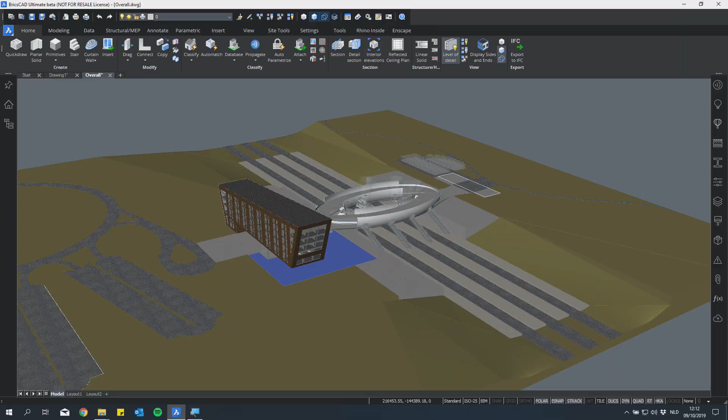So the Flowing Station is on a major rail line just outside of the city. It has 3 main buildings associated with it. On the east side, which can be approached from the bike path, will be an area for bike storage and also the new headquarters of the Travel by Bike organization. Currently, it's just a footprint.

On the west side, which can be accessed by car or by foot, will be the railway station operations offices, as well as a major entry to the terminal. These two buildings bracket the terminal, which spans across the tracks, connecting the two buildings, and also providing access to the platforms below.

This is the context for the current design. But as you can see, we've got quite a bit of work to do, especially since it's not living up to the term flowing just yet.

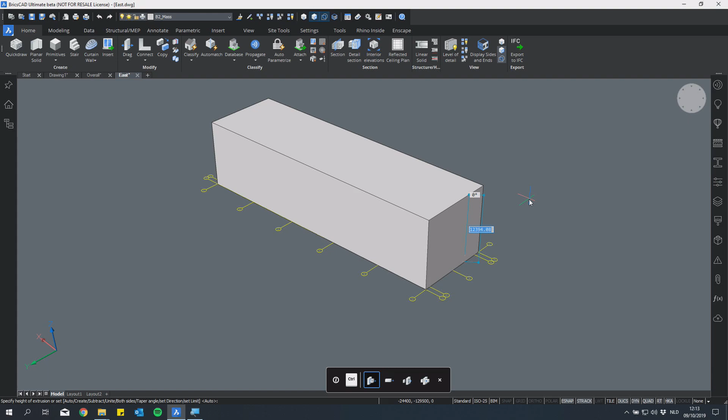We can start with the east building. From a footprint that is part of the grid, we can just create an initial solid. We can highlight a surface, select rotate from the quad, and quickly change the angle of it. We can start to do this on a number of different surfaces to begin to sculpt the form. What we're wanting to remind you of is how easy it is to model with BricsCAD BIM. You've got tools like extrude, push-pull, rotate, and others right at your fingertips.

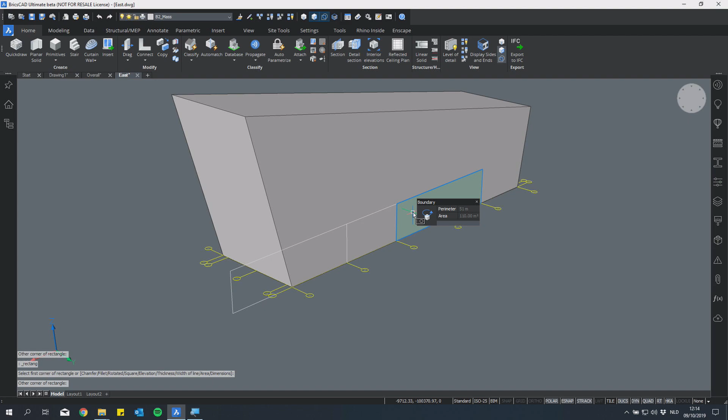So you can focus on the important things, the design. And, oh, by the way, if you notice that Jacob is using the dark UI as well. You can also start to create polylines in a way that you can use to create different boundaries, select those, extrude those to create voids. And then we can start to quickly manipulate the form in other ways, so that we can begin to create a companion form to the west building.

The design doesn't have to stop here with just manipulating the form. What we can begin to do now is start to transform this into a more refined design. We can select the overall solid and use shell to transform that into an envelope that's going from the outside in.

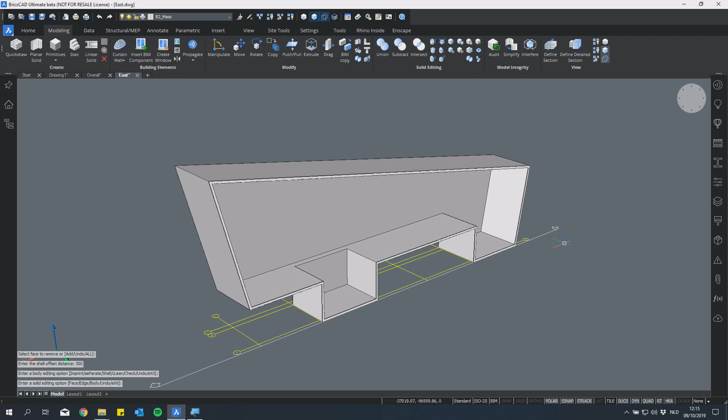Now this envelope is obviously a continuous envelope, so we need to do a little work in terms of how we're going to separate that envelope into linear solids.

These are tools you may be familiar with, but we can use tools such as slice that allow us to look at that intersection of where things are coming together, select a surface, and separate those, so that we can start to get the set of linear solids we want. We can also use tools such as BIM split, which allow us to do that for multiple intersections as well, so we can get to the desired set fairly quickly.

At this point we can start to step inside and clean up some of the forms that may not have transitioned the way we wanted. We can also separate and put a partition separating the vertical bike storage from the travel by bike organization headquarters.

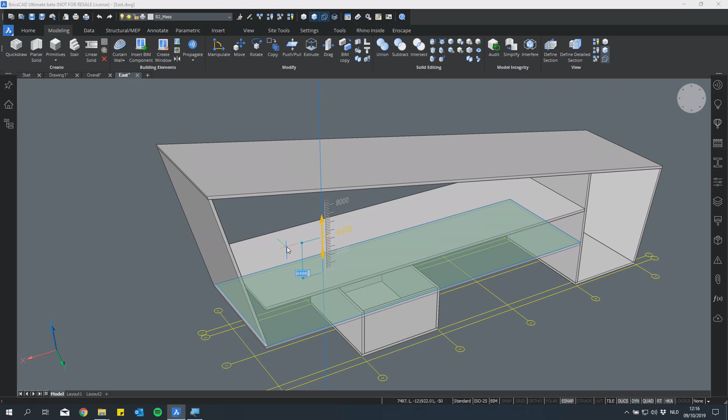Now we're at a phase where we can use BIM drag to create multiple levels, where we can use the distance scaled as it appears, or input a value directly into the dynamic dimensions. We can easily make adjustments, select edges, and reach to nearest so that we can get to the sloping wall surface as well.

Now, we're not going to win any awards for interior design here just yet. So what we can do is also use BIM drag to create other primary partitions that are going to be part of the building.

So fairly quickly, we've now got some of the interior laid out, the floors laid out, and the envelope, but it's pretty boring at this stage. So we can start to introduce some transparency to this.

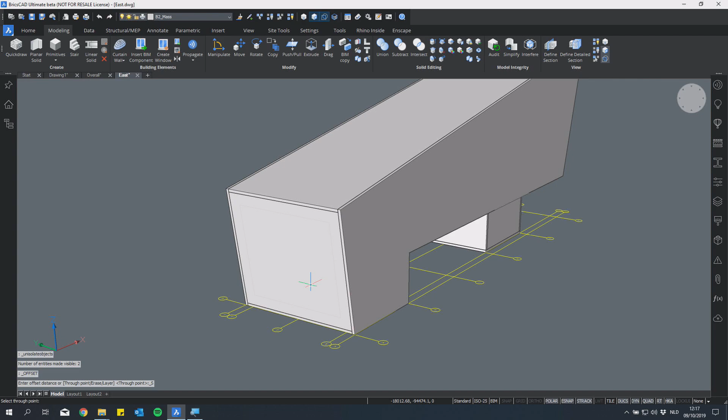We can select surfaces, offset those to create other boundaries, and use BIM window create to generate a parametric window.

We can start to step to the long side of the building and maybe break that up by introducing a line that starts to break down that overall surface into multiple boundaries. Again, we could use things like offset if we wanted to keep the glazing a certain distance from the edge.

We're just trying to get initial ideas down, so we can copy lines to create, refine, or break down that boundary even further, ultimately getting to the set of boundaries we want. Again, we can use BIM window create to do it.

Now, the important thing to note is that we're not just creating transparent representations here. These are parametric windows that we can adjust and refine as we move the design forward as well.

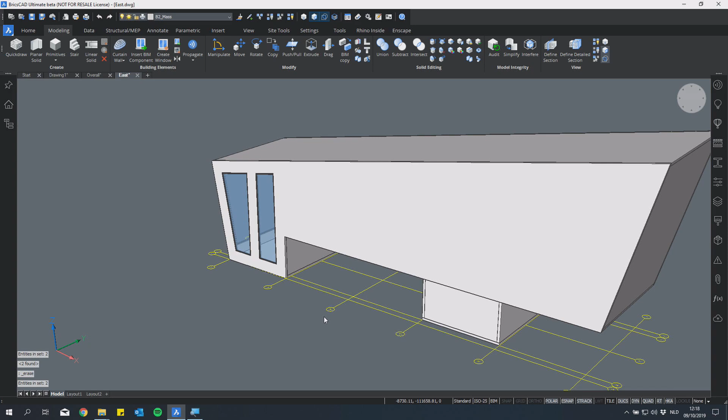Part of the goal is that we're trying to also have this be a companion to the west building, and a key characteristic of that is making the larger form appear that it's resting on a glass box. So ultimately, we want to create the set of surfaces to get that design idea in place. This quick modeling is something that BricsCAD takes very seriously in terms of how you can work with surfaces and other things to create these kinds of components.

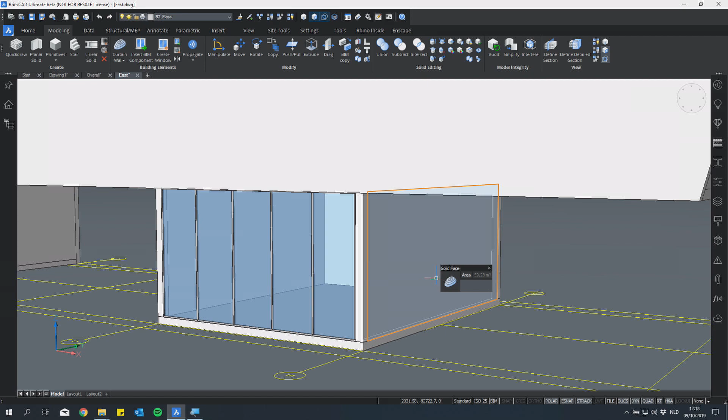So what Jacob's doing now is using the curtain wall tool to set an initial module for the curtain wall assembly and then create it. We can quickly do it on the other side as well to get the design idea in place, entering the dynamic dimensions, creating the module, and then creating that set of curtain wall panels.

Now we're at a point where we want to start sharing the design ideas with the project team. We used to have to do that by going to 24/7 and uploading the file, but now, as you heard earlier, with the 24/7 panel we can stay within the BricsCAD environment and do that. This contains all the project drawings. The east drawing shows a little icon that says locally modified, meaning we've made the last changes and need to update it. So we can select upload.

And then we can add a description to this upload or to this version so that we can tell the team what some of the changes are, and that's just initial design ideas. Then we can upload it, and you get status, but then you also get that it's up to date.

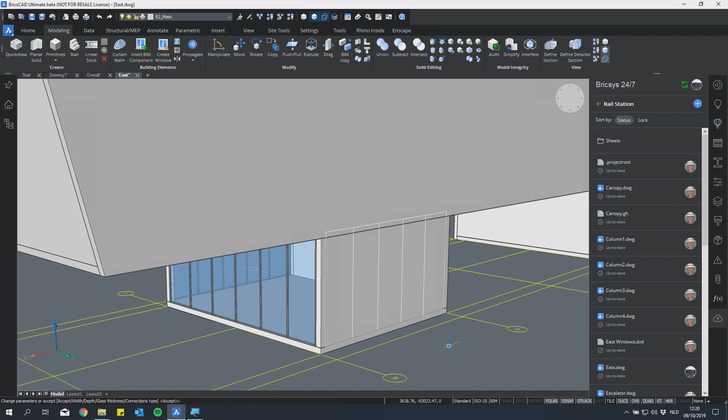And so now, Jacob, since he's also still in BricsCAD BIM, he can start working on the rest of the exterior elevations or design ideas for this. So Tiemann, why don't you show us how we can create a canopy that starts to give some movement to the design.

So here we can see an architectural concept sketch, which shows the initial idea of the flowing canopy. We want to create some kind of grid shell that is flowing over the terminals and the tracks. And this grid shell needs to fulfill several requirements, like it has to be structurally sound, of course. It should offer rain protection, wind protection, and it can also serve as a system for sun shading and for providing natural lighting below the canopy.

So we are in a very early design phase, and we want to capture this design intent, this design brief, in the form of a parametric model. The way we can do this is by defining the parameters and the relationships that will build up such a parametric model from bottom up.

This kind of approach, we call it algorithmic modeling, has the benefit that you can control the geometry of complex structures like this canopy in a very efficient way. And you can also very easily explore design variations. So by changing some of the parameters, you can see how this will influence the design of the canopy.

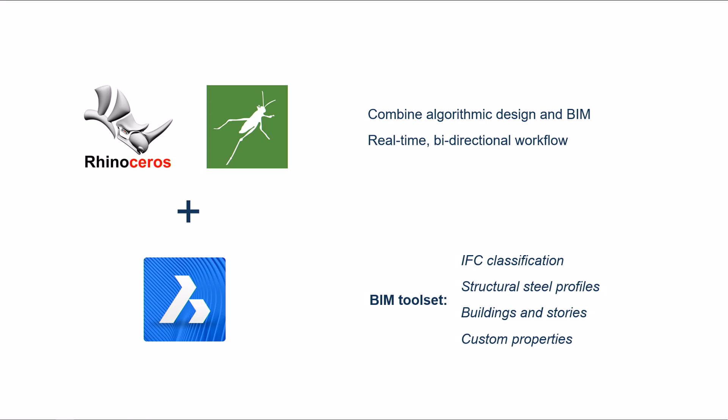So algorithmic tools are available in the market, but they are typically used in a very early design phase, long before BIM tools are even involved. And in order to bridge this gap, we have partnered with McNeel to implement a connector tool between Grasshopper and BricsCAD BIM. So this connector tool is based on the Rhino Inside technology that was developed by the team from McNeel. And they will also give a presentation tomorrow.

If you want to hear all the details about this technology, please make sure to follow their presentation tomorrow as well. The benefits of this connector tool is that we can now support a real-time bidirectional workflow between Grasshopper and BricsCAD BIM. And we also offer a toolset of BIM-ready components that can be used in the Grasshopper environment. So let's now show you how this works in V20.

So the connection between Grasshopper and BricsCAD BIM will be available as an application free of charge from the App Store. It will be part of the Bricsys collective. So the goal is there to provide a very smooth user experience for our users to get, to download, and to install these kind of applications.

So with this application, it will be possible to connect to Rhino and Grasshopper. If we have the application, we can launch Grasshopper from the quad, and we can now see the Grasshopper application running on top of BricsCAD BIM. We see here the network, the Grasshopper network.

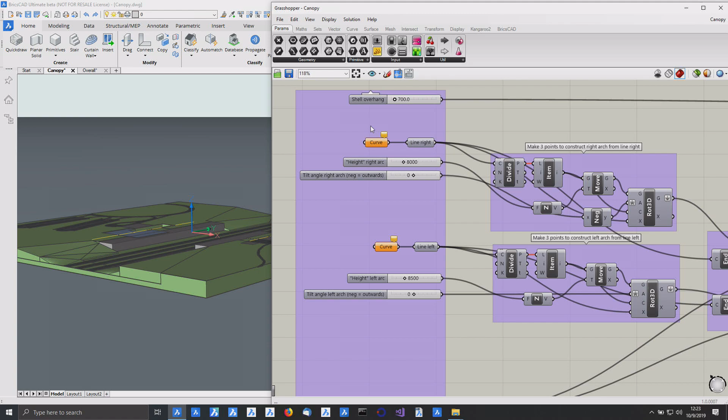It looks quite complicated. It defines all the parameters and the components, and the wires that you see are the different relationships between these components. So this network completely defines our canopy. We have created this beforehand.

But we could also see that some input parameters were still missing. So we have to select two input curves, and we can select curves inside the BricsCAD BIM model to connect the Grasshopper script to BricsCAD BIM. If we do that, we can see a live preview of the geometry that was created in Grasshopper immediately in the BricsCAD BIM environment. So in other words, this means that Grasshopper is now running inside of BricsCAD BIM.

This is a real-time dynamic workflow, so we can still make changes. Like Peter just adjusted the input curve, the line. You can see that it immediately changes in the model as well. We can also change parameters, like the amount of shells, for example, 9 or 12. And like this, we can explore different design variations.

So you can see that everything is running very smoothly, and you can real-time see the effect of the changes in the model.

We would also like to take this integration one step further beyond geometry. We have added a tool set inside Grasshopper that allows you to add, for example, classification types to your Grasshopper geometry.

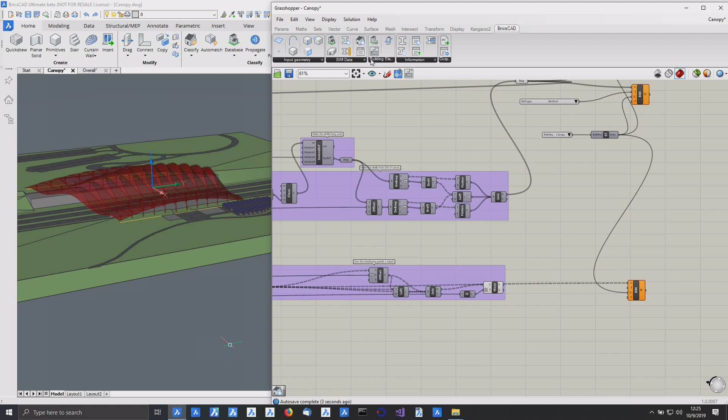So you can add any BIM type, which is closely related to the IFC schema. You can associate this BIM data with your geometry as well, choosing from a list of all the possible IFC types. Like in this case, we are going to use column, roof, and window to classify our entities.

And as a result of the principle, design first, then add your data, this is very easy to accomplish with BricsCAD BIM. So you have a lot of freedom to create geometry and add your classification data to it later.

If we are happy with the result, we can bake this geometry to BricsCAD. Baking means basically that you translate the preview geometry that we just saw to actual native BricsCAD BIM entities, so actual 3D solids.

If you bake the geometry, these entities can be used for further editing in BricsCAD BIM. So for example, you can use it to generate 2D drawings, to extract schedules, or to export to IFC.

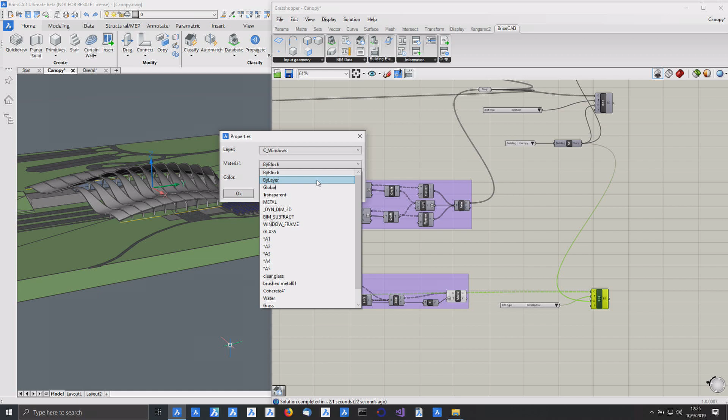And if you do that, all the additional data will also be available. So for example, the classification data that we have added, if we select one of the columns, we can see that this data is available.

Also layers, materials, properties, structural steel profiles, all these kinds of components are available and can be used in combination with Grasshopper and BricsCAD BIM.

So if we are happy with this result of the canopy, we can reload the XREF of the canopy in the overall model to see how it looks in the context of the overall rail station.

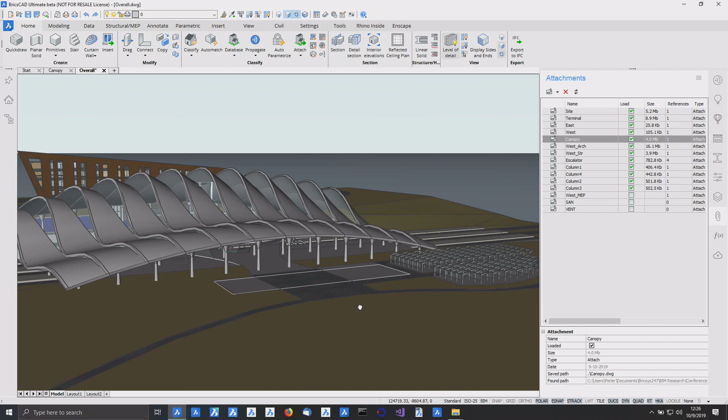So we are happy with this first conceptual design, and we can share this model again with the team by uploading it to 24/7. We can add a short description, and now the canopy will be available for everybody who's involved in this 24/7 project.

Meanwhile, while we are looking at the 24/7 panel, we can see that a newer version of the East building is available. This is the East building that Jacob has just been working on, and he has created the initial conceptual design.

So Peter can now download it to his local machine, and he can see the version that Jacob has just created in the context of the overall rail station model.

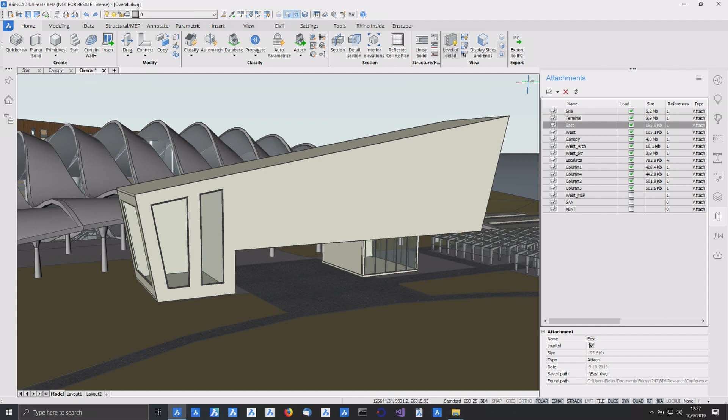We can also see that this East building is not quite ready yet, so a lot of detail still needs to be added, like windows and compositions. So we'll now switch back to Jacob's screen to see how he has progressed.

A few oohs and ahs, maybe?

Thank you, team, and that's a fairly hard act to follow, although, if you'd noticed, Peter's using the light UI, but we'll let it slide.

Kind of going back to the East building and looking at the stage of the design, Jacob has continued to work on the facade ideas for this and started to develop the initial glazing, started to do a little more work on the interior, and also create some of the core elements such as the elevator core.

We can isolate a portion of this building and start to develop another core element, the stairs. So there's a new BIM stair tool, and what it allows you to do is quickly select a starting point, and we can create a stair that wraps this elevator core and has multiple runs.

So we can do that by selecting an initial starting point and then setting the directionality of the stair and then selecting the endpoint at the top.

Once we do this, it creates an opening at that landing floor. That's a parameter of the stair, so that can be changed. It could be set to code requirements or regulations, or you can use tools such as BIM drag to just recreate or put it where you want.

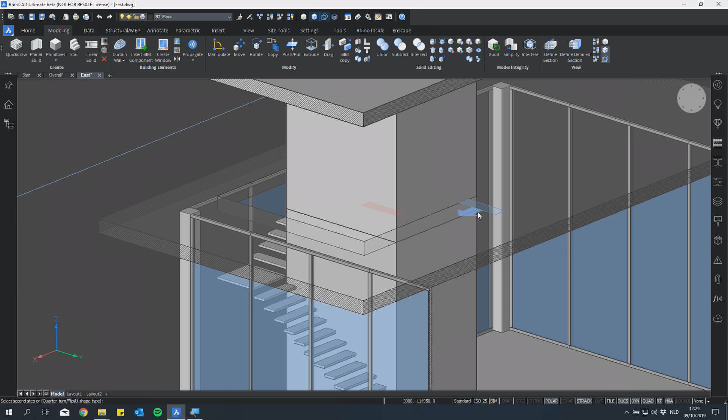So when you're creating the stairs, there are alignment aids with it and a stickiness that helps you select the starting point. And then as you start to move up with it, the directionality of the stair starts to take shape. You're able to visualize it.

You're able to look at the length, width, the size of the stair, rather than a let's wait and see approach. So once you start to get used to BIM stair, you'll find that it's easier to use to just create the stair than it is to copy it upwards if you were doing it for multiple floors.

So BIM stair is an intuitive way to create the stairs for single run stairs, L-shaped, U-shaped, or any other letter-shaped stair that you want.

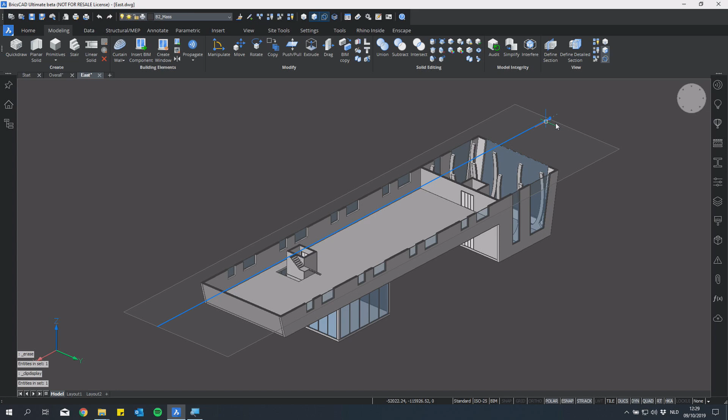So now let's go to the interior quickly. One of the design team members has laid out a 2D layout that we've incorporated already into the model, so we can display this. We could use the polysolid tool to begin to create the 3D walls for this, or 3D solids, but we'd have to set the heights, change the thicknesses multiple times, and have a lot of stops and starts. Wouldn't it be nice if there was a tool that adapted to what that layout was?

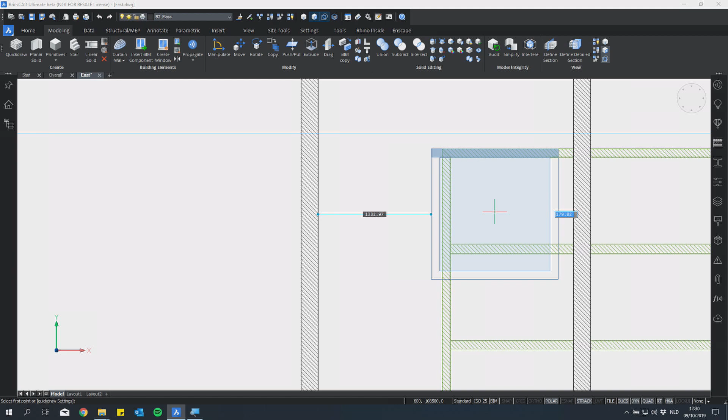As you might imagine, Quickdraw has some new features that enable us to start doing this. It adapts, as you can see, to the width of those walls, whether it's a single wall or a second wall that's at 90 degrees to it. What we're able to do is quickly do the layout, create the layout, and it turns into more of a 3D BIM game than a tedious exercise. When you're creating this, it's also aware of other solids that are present, the exterior walls and other things, so you don't have to be as precise. You're able to lay this out fairly quickly.

And as you notice, there's also these alignment aids that help in selecting the point where you want it to be. To tie back to the BIM stair side, if you had a design that had multiple floors with the same interior layouts and stairs, Quickdraw can also copy those interior walls and the stairs upwards as well.

And you can use all the other tools within BricsCAD BIM with it. So you can use BIM drag to create other partitions within it. You get to decide how quickly you want to create and the ways that you want to do things. But the important thing is that you can do it quick-drawly. Quickdraw plus ly. We'll move on.

All right, so now we have a number of linear solids associated with the model, with our BIM, but they don't really have a lot of data, so it's a good time to start to introduce data into the BIM. We can do that very quickly by selecting Bimify.

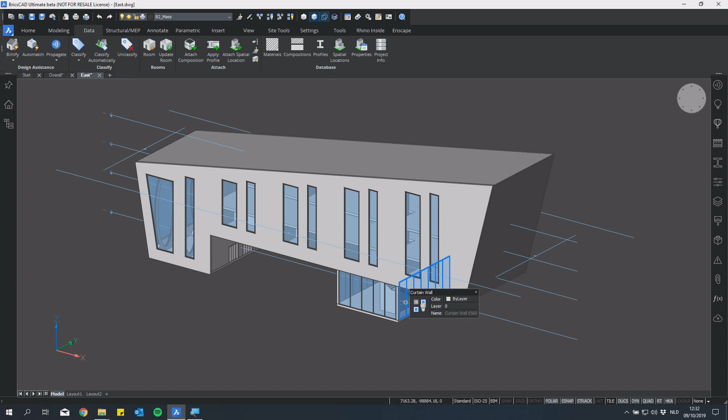So what this is doing, as was mentioned before, it's creating the representation of the building, setting the levels - the exterior solids are becoming walls, the interior solids are becoming walls, it's setting the floors, and we're also getting the elevations and the floor plans associated with that. So it's adding a lot of data pretty quickly to the BIM, even more quickly than I can describe.

But the idea is, isn't that the way data should be? It should be able to be added to the model as we progress, and we don't have to input it.

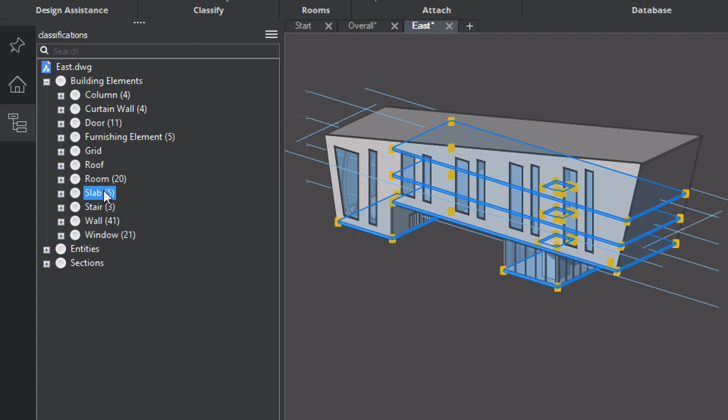So now, once we've done that, we can look at how it's categorized. The structure browser ends up displaying the categories for those different classifications. By selecting those, they're highlighted in the BIM, so you can quickly see which things are under what category, the quantities, and also some have additional refinements or filters. In the case of walls, it's also scanning and looking at what are exterior walls and what are interior walls, so it's automatically setting that up for us.

But now we're at a point where we want to add another level of detail to it. And there's a tool called Automatch that we're going to talk about now. Bimify, what we just showed, classifies things. But if we wanted to add compositions to the overall model, we can start to do that as well.

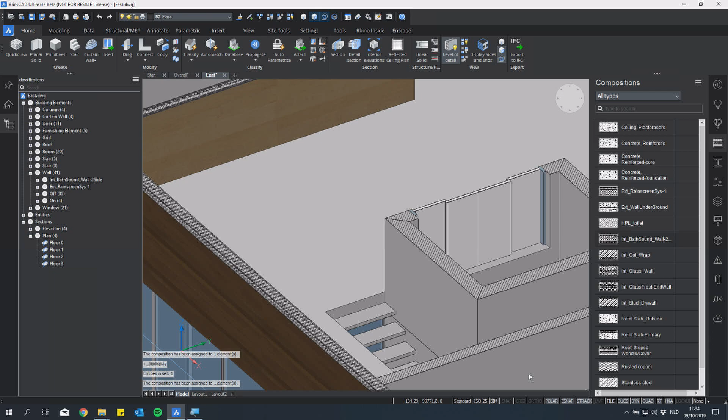So with the compositions panel, we can identify the composition that we want, and we can drag it and drop it onto an exterior wall. You get a visual indicator that it occurred because the wall is displaying a material. Now we can step inside and we can do this also for an interior wall and for a floor. What we're doing is we're introducing the unique compositions to this model.

Once we have those in place, then we can launch Automatch. But we have a few options here. One that we could do, if we wanted to just select the compositions in the west building, they could be applied to this building. But since we've started to already apply compositions, we can use the ones that we have and use Automatch. This is scanning the model for the solids that are the walls and the slabs, the floors, the interior walls and others, and it's looking to see if it can apply those compositions to that.

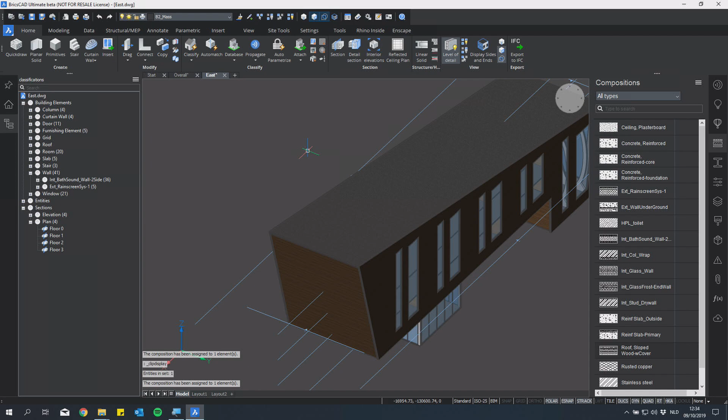It seemed like fairly quickly we're getting the compositions assigned to the exterior, and we're getting that additional level of detail. So all these walls now have all the composition associated with them. And if you notice on the structure browser, it's now being categorized by the composition itself.

So you can imagine the time savings as models increase and the complexity increases of what this can provide in ways of associating data into the BIM.

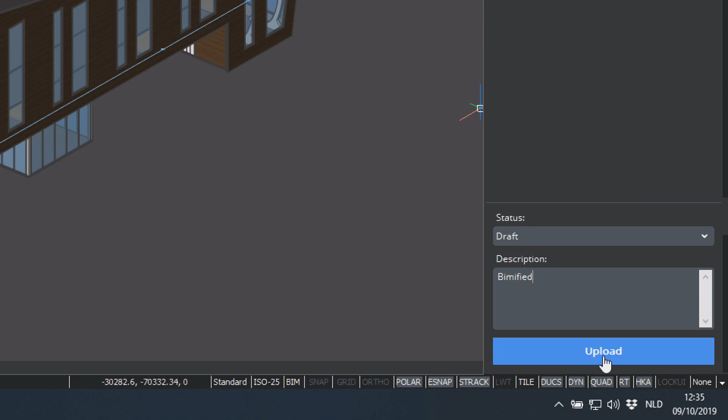Now we can also start to share this updated version of the East building with the design team. So again, we can go to the 24/7 panel. We can upload our locally modified version. We can include a description. And then it's there, and we're able to move on.

So, Teeman, why don't you show us ways that we could start to auto-create drawings for this East building? So, Jacob has finished the modeling and adding the data in the East building. So we will now see how Peter can create design documentation for this project.

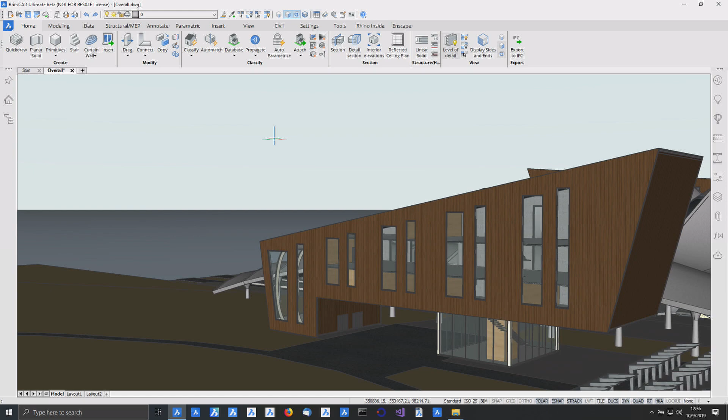So when we talk with customers, we often hear that they spend a lot of their time on generating the 2D deliverables. So generating the drawings, annotations, dimensions, it's a time-intensive job. While rather they would spend more time on the actual design or on the 3D modeling of the BIM. In order to allow this, we will now show you several new ways how automatic generation of 2D drawings can be achieved.

In the meantime, we can see that Peter has downloaded the most recent version of the East building that Jacob just created. We can see that the render materials are applied, we can see the staircases, and we can see all the level of detail that Jacob has introduced. So we are working on the most recent version. From this, we will start creating the drawings.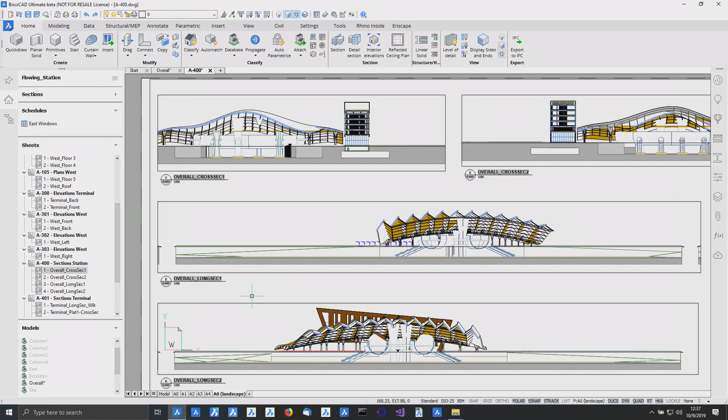On the left of the screen, you can see the project browser. The project browser is the control center to control and manage all your 2D drawings, including floor plans, elevations, sections, but also schedules. So Peter is now using the project browser to show you a quick tour of some of the sheets that were generated beforehand.

And while he's doing that, I'd like to explain a new functionality in V20, which is background updating. Background updating means that multi-core processors will be used to update all the 2D drawings in a background process. So this means that you can just continue working on other parts of the design while all the 2D drawings are being generated, and you no longer have to wait until they are finished.

So here we can see a floor plan that was generated with BricsCAD BIM. It was automatically generated, tags were added in an automatic way, and with very little effort also dimensions and annotations were added. So this is the kind of level of detail that you can easily accomplish with BricsCAD BIM.

We will now show you how you can create a new sheet set from scratch in just a few clicks. So we open the sheet set setup, where we see an overview of all the sections that are defined in our BIM project. We, of course, only select the sections for the East building, and we can see a preview of this, how they will appear on a sheet.

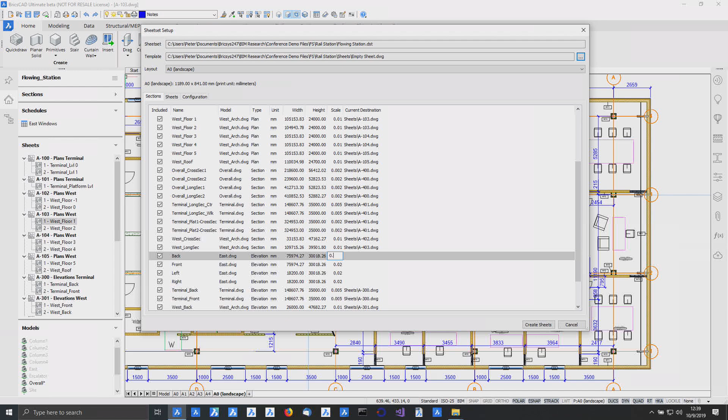Of course, in this case, they are indicated in a red color, meaning that they don't fit on the sheet. So we can fix that by either choosing another template with a bigger paper size, or by changing the scale of the sections. In this case, Peter is changing the scale of some of the sections from 1 to 50 to 1 to 100. If we then go back to the preview, we can see how the sheets will look like, and everything nicely fits on the sheet.

So if we are happy with this configuration, we can press the Create button, and automatically it will start updating all these sections in a background process. If we zoom in on the project browser, we can see that all the sections are being updated, with a visual indicator showing the status of these 2D drawings. We don't have to wait until all of this is finished, so let's continue and show some other new interesting ways for creating design documentation in V20.

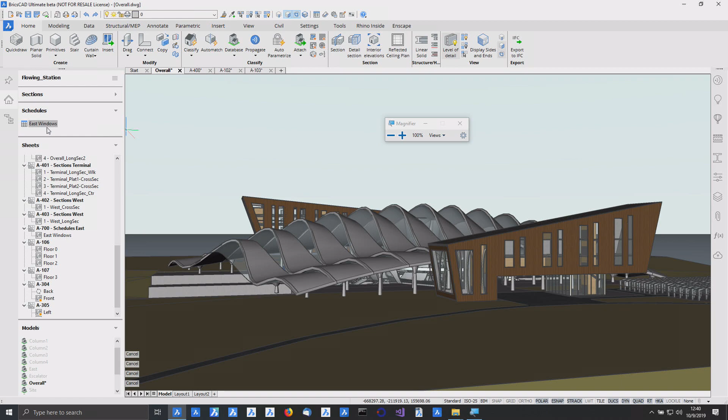A first interesting new way is for schedules. Schedules are bill of materials or quantity takeoffs, and we have significantly improved the performance of creating schedules, along with several enhancements. For example, it is now possible to add elevation views to your schedules, which is very handy if you want to create a window schedule. You can see a visual preview of the windows in the schedule as well.

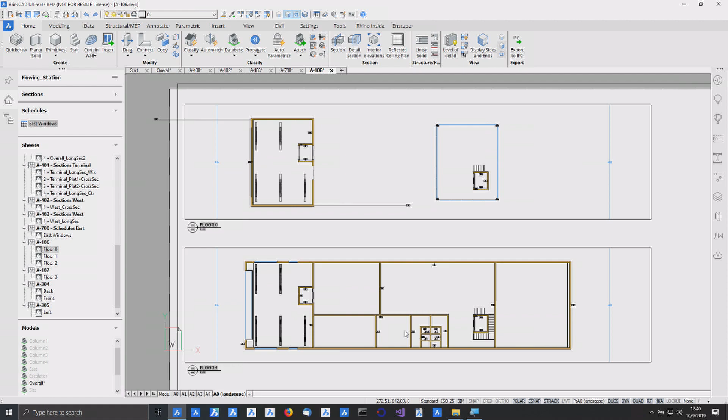In the meantime, our sections were updated, so we can open a floor plan. On a floor plan, tags are generated automatically. In this case, some wall tags were added, but we can still add other tags as well. Tags are completely customizable, and you can add them automatically or manually. There are also new ways in V20 to add tags for compositions, which show the different material layers used in the specific walls or slabs. There are a lot of possibilities using the BIM tag technology.

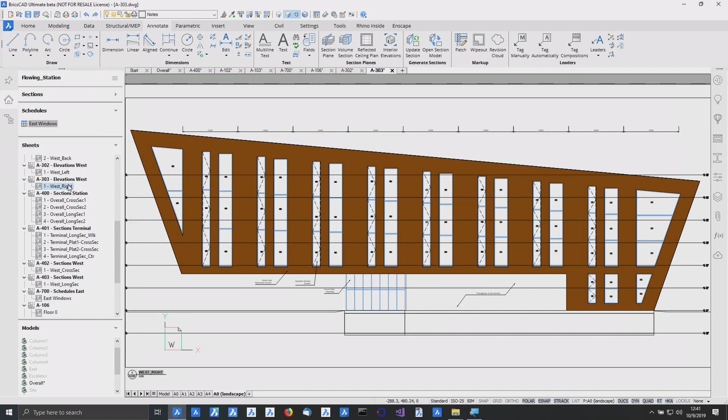A third enhancement for design documentation is for elevation views. If we open an elevation view, we can see an elevation hatch was generated for the walls. This is because it's now possible to add elevation hatches in your BIM library. You can choose between solid or pattern hatches, which are also generated automatically on the elevation view, giving another dimension to the generated drawings.

With these kinds of improvements, we have tried to make it a lot easier to generate and sync all the 2D drawings with your BIM model, hopefully giving you more time to focus on the actual modeling or design of the building.

With this, we are going to switch to another topic which Kevin will introduce, about collaboration and issue management, or rather the lack of collaboration. Thanks, Steven.

So, construction projects tend to have a lot of project teams located in different places. A common theme is that issues will come up, and it's important how those issues are transmitted and communicated.

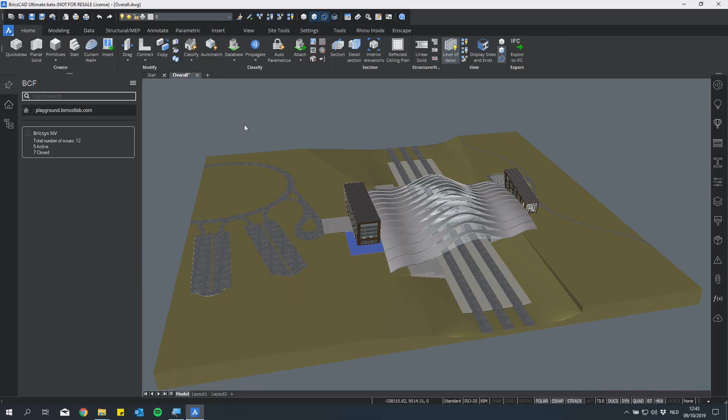The design of the West building is a little bit farther along than the design of the East building. The architectural, structural, and MEP designs are nearing a point of a submission deadline. A project manager has done a review and created a set of BCF issues that are being shared with the team that must be dealt with before the submission can be done.

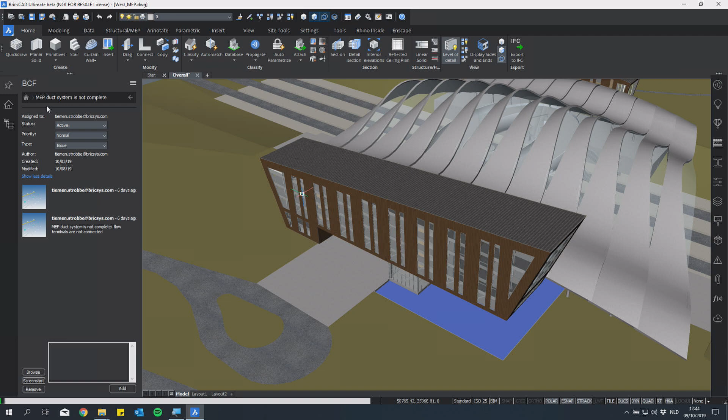So Jacob can log into the open platform where the project manager created the BCF issue set, and get access to that overall set. One of the things we noticed is that one of the first BCF issues is related to MEP. You heard earlier that Jacob's a pretty quick and talented guy, so he's going to put on his mechanical engineering hat.

We also saw in the application store, with icons listed, that AX3000 was one of them. This MEP layout was created in AX3000, which can be brought into the BIM and incorporated into it, and we can start working from there. But back to the BCF issue: each one has a unique ID, a description, a viewpoint associated with it, and it can also have selections associated with it if applicable.

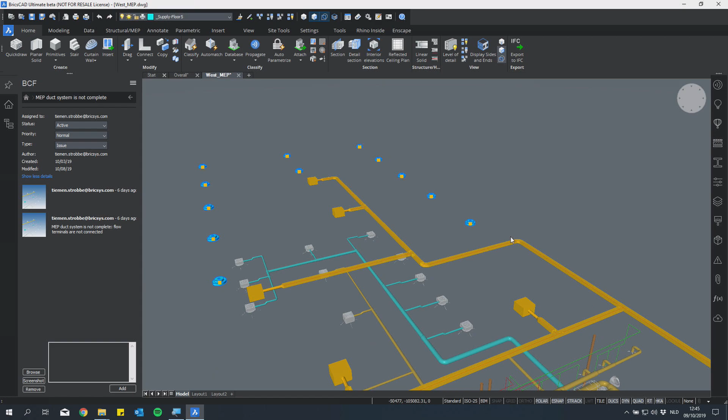So in this case, we can select on the viewpoint, and we're taken to that portion of the mechanical layout that needs to have a new duct branch created for it. We can start from this point, add the vertical to that set, and begin to create the duct branch by selecting Connect. This gives us options for what this duct branch will be created with, or what it will look like.

We can select one of these, then go to a next level of refinement so we can identify which segments we want included. We can select or deselect those, getting visual feedback updating the layout of that duct branch. Once we get the set we want, we can finalize the creation of that duct branch, with the main ducts going off the fitting size at the vertical, and the others off the fitting size of the terminal.

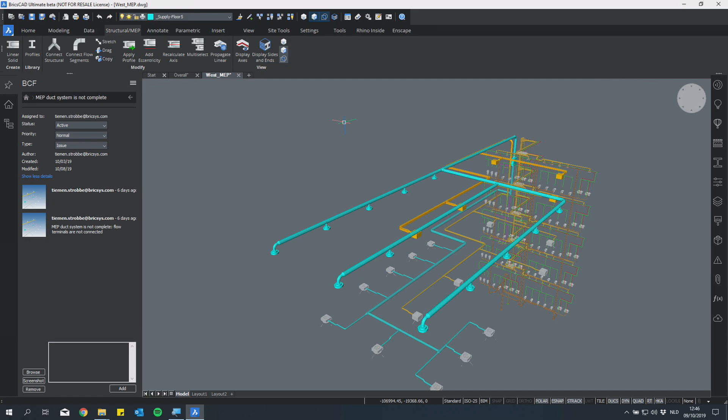But once this is created, we can also continue to work with it and direct model it. So if we needed to adjust the height based on other clearances or issues identified, we can use BIM drag to raise and lower that whole branch, and that maintains the connections to the duct branches going to the terminal as well.

So now we can go back to the BCF panel and mark this issue as resolved. When we refresh the panel, we'll notice there was 5, now there's 4, one less. We could also include a description with that, and if we wanted to capture another viewpoint, we could do that as well. But let's continue on.

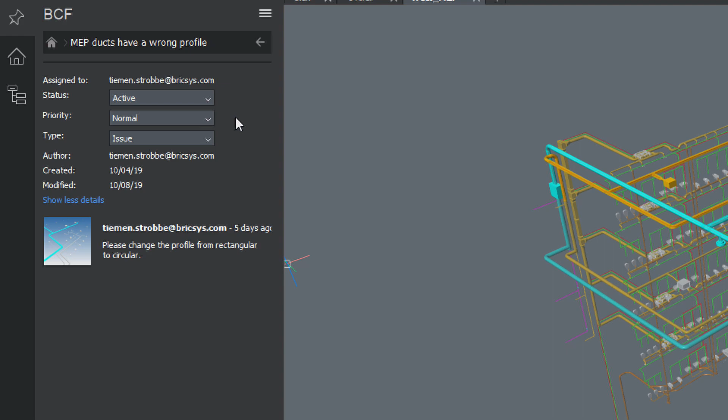This BCF issue is looking at how we need to change a portion of the duct branch from rectangular profiles to circular profiles. In similar fashion, we can select that viewpoint and we're taken to the location of that area. We can add some other selections to it, but what we're going to be doing is similar to what you saw with the compositions panel, but this time with the profiles panel.

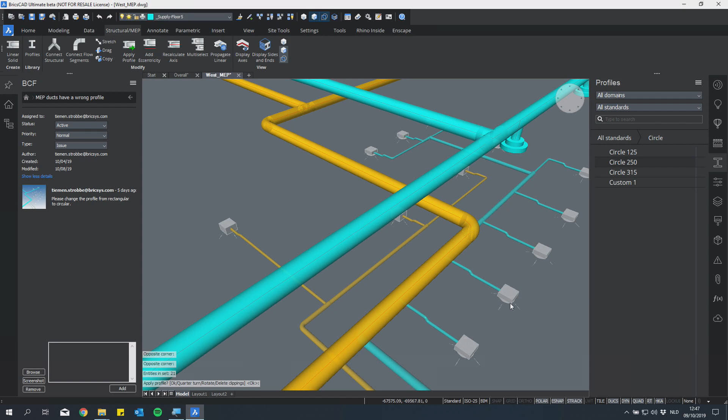Maybe these ducts need to be changed because they're in an area where the ceiling is exposed, and it would be better to see circular ducts. Once we have the selections we want, we can drag and drop. We can select the profile we want, then drag and drop that onto those selections. The overall selections update to change that profile, and it keeps everything intact, so we're not having to touch and adjust different elements as well.

So again, we can go back to the BCF panel and mark this issue as resolved. Then refreshed, and we're down to, and we have 3 other issues.

So Jacob's now going to set that mechanical engineering hat aside and put on a structural engineering hat.

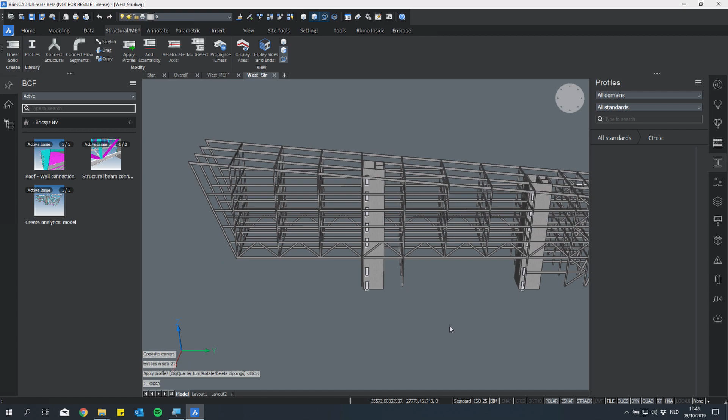What we can do is open the structural frame that is actually an XREF associated with that west building. And we can access the BCF issue. Again, with this one, what we're looking at is that it's going to be adding 2 refined structural details to some intersections and all other similar intersections within the model. So we can select on the viewpoint to see which location that is.

Now, it was mentioned earlier, but Propagate got a powerful new companion in the form of a detail library, accessible on the detail panel. You'll see some other examples as we go, but as was also stated, as you start to realize how you can use this, the library is going to increase. So you also have filters and ways to select and get to what details you want.

So in this case, we have 2 frame members meeting the beam, but our structural team has done a more detailed design, which we can click on to open. Here we get a visual of what this detail is, and we can select Propagate.

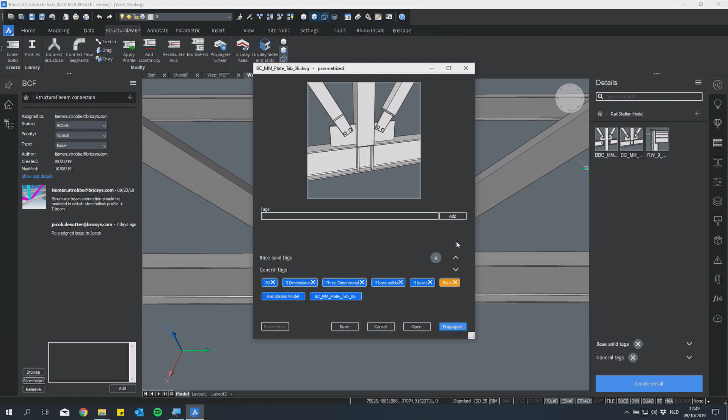So now what's happening is it's scanning the model to find similar conditions to the one for this detail, other places we can apply it, and we'll start to also get feedback on the degree of match to that as well. Fairly quickly, we've got numerous locations on the overall structural frame. The green region is outlining where that detail is being applied, and you can visualize what the application of the detail is going to look like.

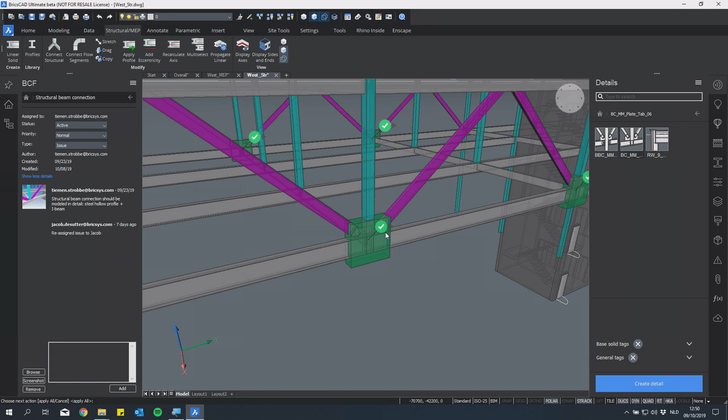Similar to what you may have seen before, you can deselect or select these as well, to ultimately refine your selection set. Then you can finish the Propagate process, and it's directly modeling those details within the BIM at all those locations that were identified. I know you've seen that before, but come on, it's fairly impressive.

Building on that theme, with the second version we see a column going through, and then we have beams, so we're going to need to support those beams somehow. So maybe a plate and bolt connection might be a smart thing to do.

We can also access a detail here. You'll notice there's a number of filters that can be associated with these details as well, so you can get fairly precise, which makes it easier to find in the library. Again, we can open Propagate.

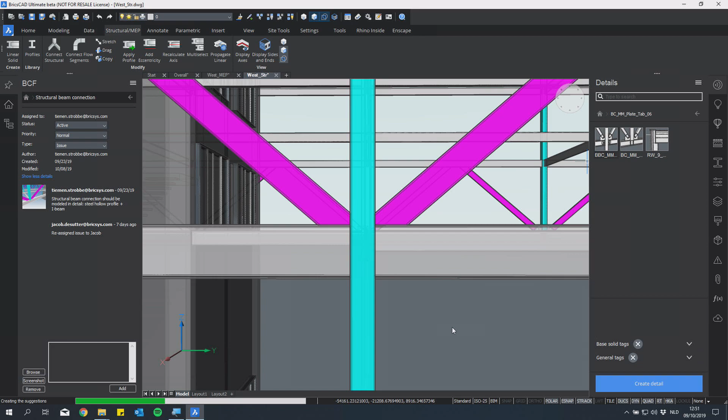Going through the similar process of scanning the overall model for similar conditions and the degree of match, what you'll see coming up is how we can also create and add details to the detail library, which provides an even exponential degree of power.

So here again, we have the region of influence for this detail. We can see what it's going to look like when it's being applied, and we can finish the Propagate process.

One thing to note with these details is that they are parametric. So if you need to make a change at an instance, all that information is being brought into the BIM as well. If we wanted to select the plates and the bolts, and adjust the size of the plate, change the bolt configuration, we're able to do that from the properties that are part of that detail that has been added.

So not only can you propagate the detail across, you're also able to refine it and shape things as you move forward with it too.

So Jacob's moving pretty fast, as we've heard he always does. So let's go back to the BCF panel.

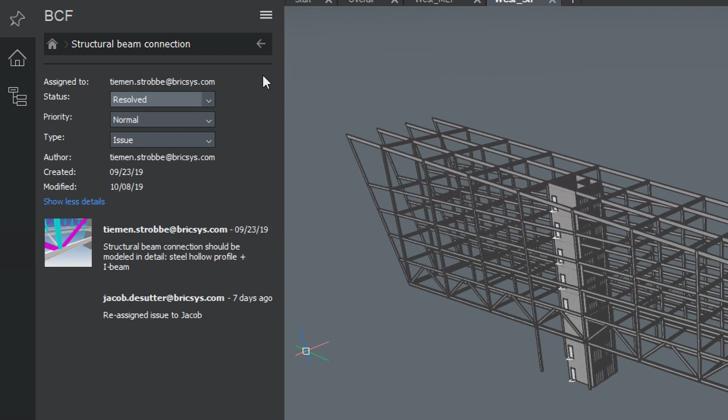We can mark this issue as resolved, and now it's shared back with the project manager and the team to provide an indication that these issues have been looked at.

Now Jacob, I don't know about you, but it seems like we're the only ones doing work here. But let's go to one more issue, and then maybe the rest of the team will pick it up after that.

With this one, we're going to look at how we can add an analytical model, or revise a version of the structural analytical model for a structural engineer, a colleague who's going to do some analysis in another program.

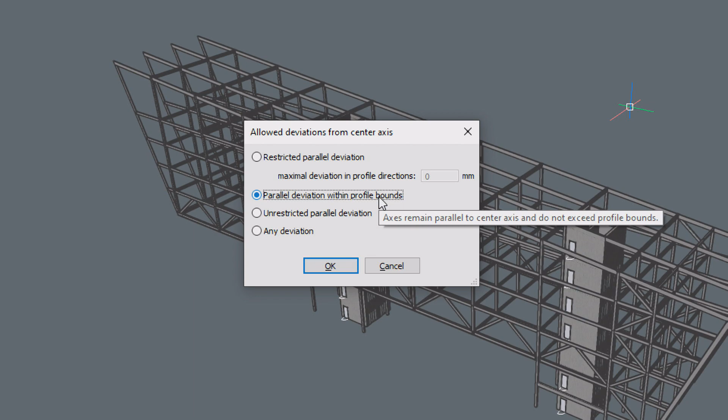Common theme, we can select on the viewpoint and see the description. In this case, with creating the overall analytical model, we have options for restrictions and constraints that we can set on the model. So we'll select parallel deviation within profile bounds, and hit OK.

What's happening here is it's now creating the analytical model for that structure. It's identifying the member locations and member intersections so that the nodes are identified, and we can investigate if it's the way it's supposed to be.

As we start to zoom in, you'll see that the nodes will be transparent circles. Then we can do a visual inspection if the connections are coming up the way that we hope, which in this case means a single node versus multiple nodes.

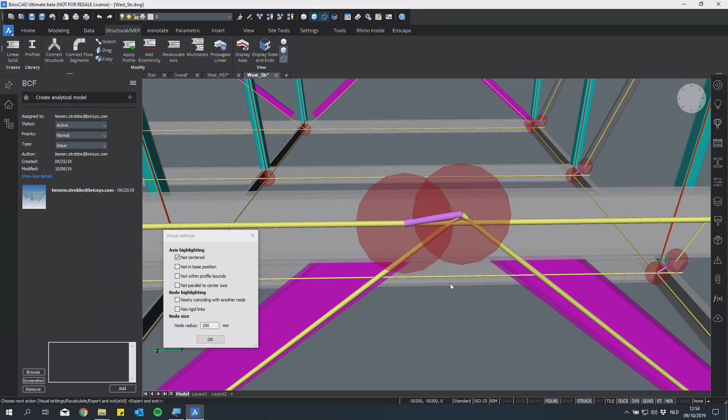And surprise, surprise, there's one that's not right. If we look at this, it's definitely not what we want. So we could go back to the model and make adjustments with the members, or we can start to look at how we can relax the restrictions and make adjustments while still meeting the intent of what we're trying to do.

By selecting the members, we can get to the restrictions and select non-parallel in this case, and see that it goes from two nodes to one. So we can mark this issue as resolved, but we can also put a note in to tell the structural engineer that when they're doing an analysis to look at this particular area, to make sure it's still meeting the intent of the overall design.

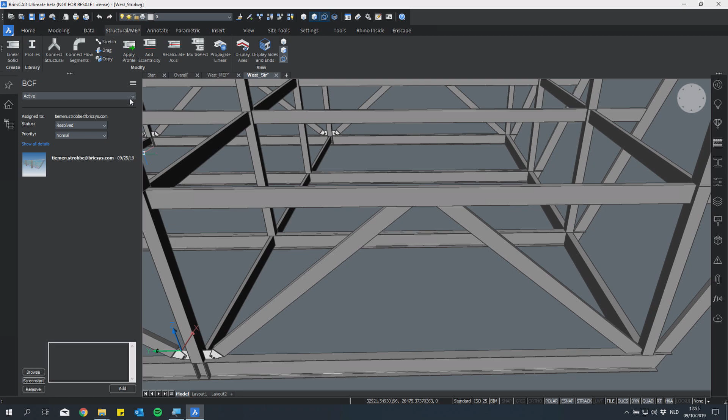So we can see on the list of Peter's screen that there is one more BCF issue remaining. It relates to the architectural model of the West building, and it says that the connection between the wall and the roof hasn't been detailed yet.

So we will use this to show you how you can create a new parametric detail and how you can add it to the library to apply it to this model. We can also activate a section plane to see how the detail looks like at this moment. We can see that the different plies of the composition haven't been connected yet in a correct way, and this is something that we will try to fix now.

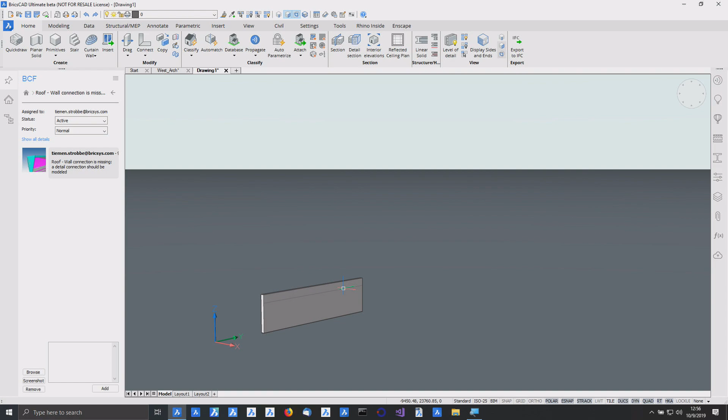In order to create a new detail for Propagate, we will start from a new drawing because it's easier to work on an isolated detail. We will model a wall and a roof entity with a similar composition as the one in the West building. I say similar, it doesn't need to be identical, because we will later on parameterize the detail so that it can be applied to different situations, for example different angles or different thickness of plies. So the actual conditions don't need to be exact.

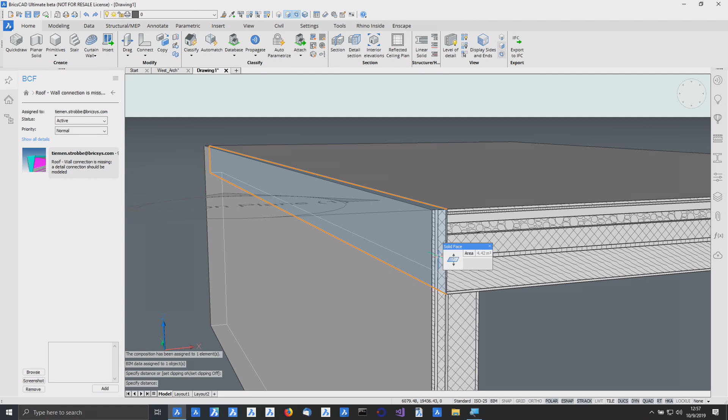So Peter will now start modeling this connection ply by ply. We don't use any templates or approximations or 2D templates to generate the details, but details can be modeled in real 3D. According to us, this is very important because it gives you, on the one hand, the complete freedom to create a complex detail in 3D, which can be very hard in 2D.

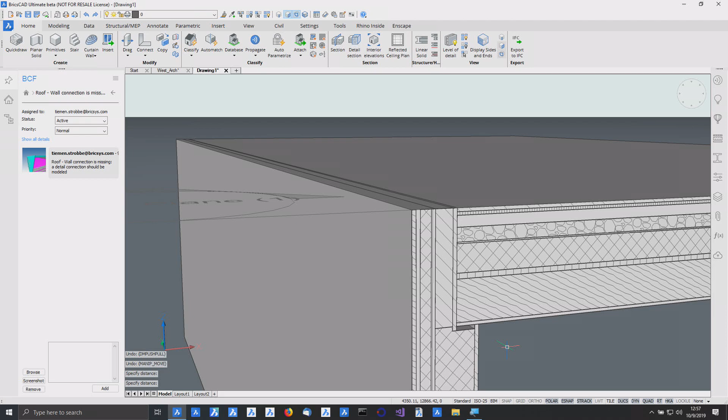And also later on, it will result in more accurate quantity takeoffs if you want to generate a bill of materials. In order to create such a detailed connection, in this case between the wall and the roof, you can use the same direct modeling tools as you know and as we've seen before, like push-pulling or extruding to create the detail ply by ply. So we are now adding an insulation block and an L-shaped profile as well, and we will also add a roof cap on top of the wall. We are using just exactly the same direct modeling tools as we've seen before to create this detail.

Now that the detail has been created, we can add it to the library in just a few easy steps. We have to define a name, we can choose a category, and then we have to select the base solids and the detail solids. In this case, the base solids are the wall and the roof entities, and the detail solids in this case are the roof cap, the insulation block, and the L-shaped profile.

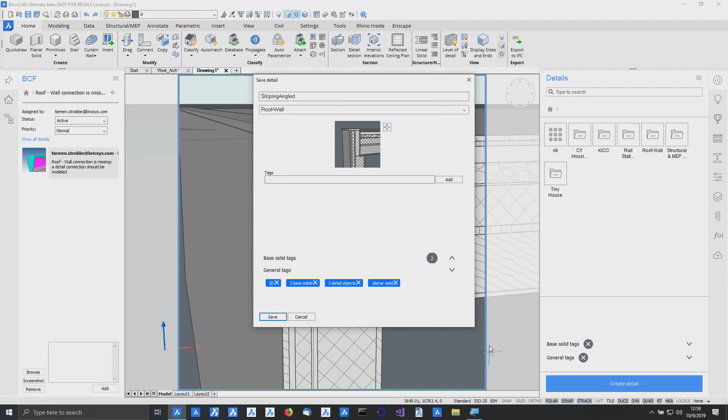We also have to select a section plane because this is a 2D detail connection, and then we can specify a thumbnail. We can generate a thumbnail of this detail to make it easier to recognize it in the library later on, and we can also add tags. So in this case, we are going to add the tag rain screen, which we can later on use to filter the detail library and to more easily find this detail in the library.

So we can open the detail that is now available in the library, and so far this detail hasn't been parameterized yet. Last year we showed you a new technology called Parametrize, which automatically converts a dumb solid into an intelligent parametric object, and we're using exactly this same technology to also parameterize this detail.

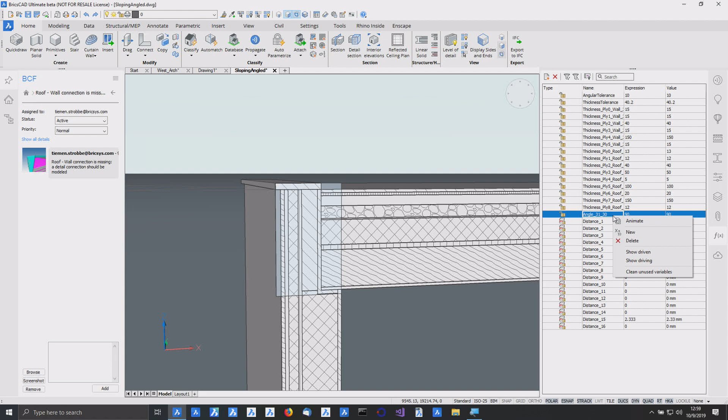So when we parameterize this detail and we animate some of the parameters, we can now see that this detail can be applied to different conditions. For example, the angle doesn't need to be exactly 90 degrees. We can still add some additional constraints. In this case, we are adding some constraints between different faces of solids to make the detail behave exactly as we would expect it. For example, we add an additional constraint between the roof cap and the wall.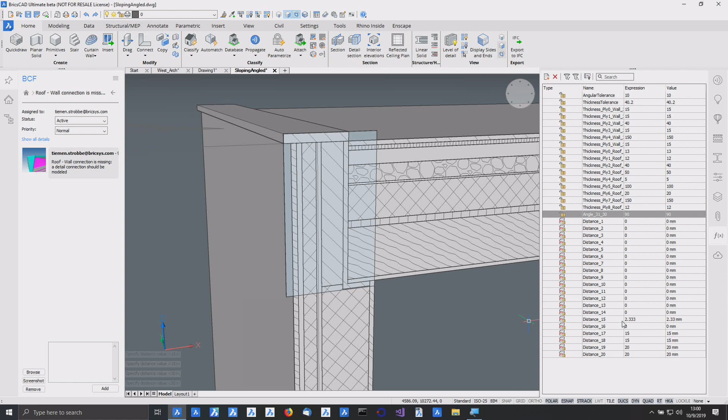And if we then animate the detail again, this is exactly how we would expect it to work. We can also change some other parameters or adjust, for example, a tolerance. And once we are ready, we can use it to propagate.

So it's very simple. You can just simply drag and drop the detail from the library onto the model, and it will start scanning the entire model for all similar situations where this detail can be applied. In this case, it has found the four different connections between the wall and the roof, and this is quite interesting because there are different angles between the wall and the roofs at different places. So with parametric details, you can also cover all these possible cases.

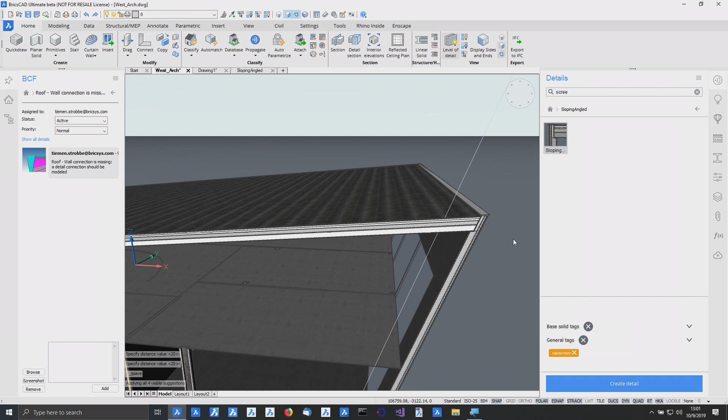Also, if we have a look at the section, we can now see that the 2D detail is exactly as we would expect it.

So we can consider this last issue as resolved. We can go back to the BCF panel, we can change the status, and if we have a look at the list of BCF issues, we can see that everything is resolved.

So it's time to switch to another topic, manufacturing and fabrication.

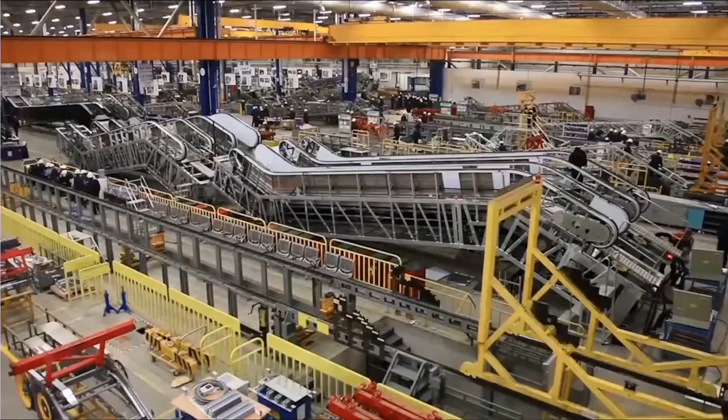BricsCAD Ultimate. You've seen a number of aspects of the workflow so far, but there are a few key ones remaining, one being mechanical. We're at a point in time where digital fabrication is becoming more common, where we can go from model to fabrication to product. If you think about it, there are a lot of different mechanical assemblies that can be part of a BIM. Window assembly types, curtain walls, elevators, and a number of others.

Detail is great if it's useful. Over the years, I've seen a number of BIM models that have modeled everything that could be modeled, but the detail really didn't serve a purpose. It definitely didn't serve the purpose of digital fabrication.

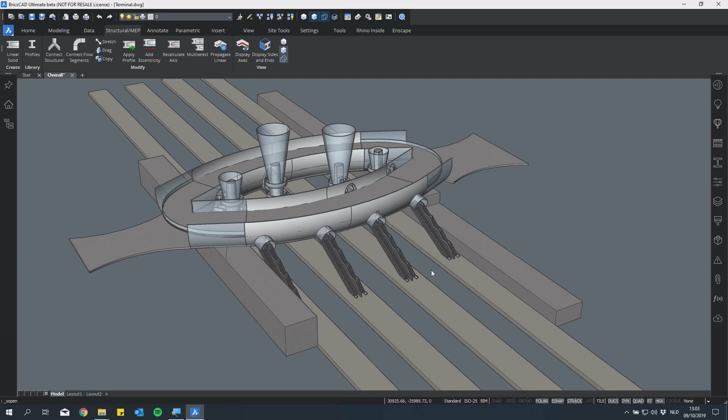The terminal building has a placeholder for a stair and an escalator that's going down to the platform. But the mechanical team has let us know that they've developed a fabrication-ready escalator that they'd like to see how the look and feel is. So we can incorporate this fabrication-ready component into the BIM by replacing this block and adding the escalator assembly.

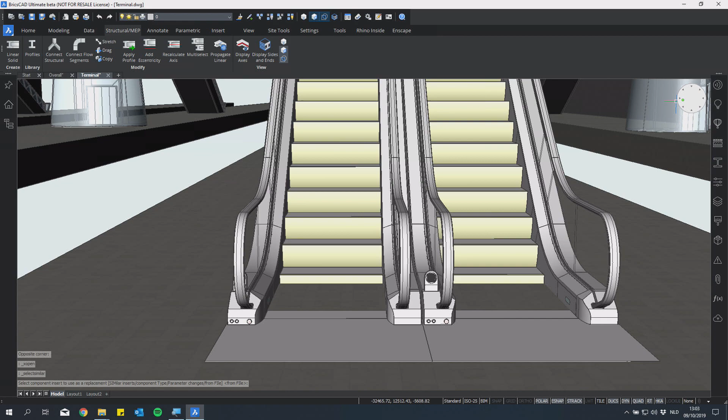And what this allows is, from an architectural perspective, we can start to look at the spacing, tolerances, clearances, the overall look and feel. From a mechanical perspective, we can start to investigate if adjustments need to be made. If we need to change the properties that are associated with the escalator, we can do that directly. Or we could go and change the system directly if we wanted to as well.

From a technical standpoint, we're still in BricsCAD BIM. We're not having to translate information from another tool, so we don't have to be concerned about data loss. And also, since we're in the BricsCAD BIM environment, we can open this assembly directly.

We can start to explore detail in numerous ways. One of the ways, an exploded view, systems overview, kind of provides a way of looking at the detail of this. You can look at static views. You can also look at it in an axon view, zoom in, start to explore different areas.

And we can also animate this and just sit back and have fun watching it. But the animation also informs not only the quantity of components, and there are quite a few, but also the fit and relationships of things as well.

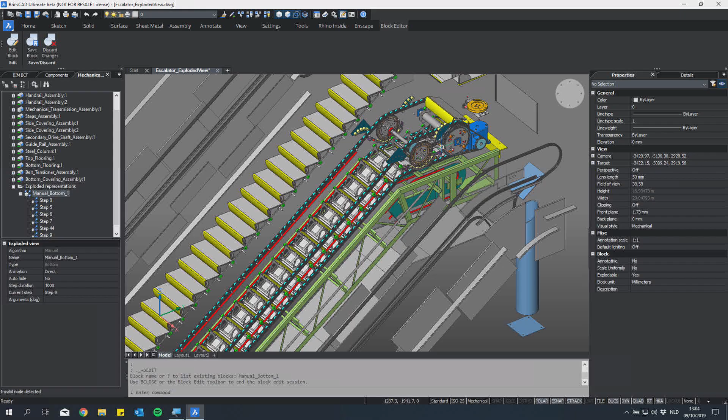So, just to harp on the detail, there is a slight bit of detail that's associated with this escalator assembly, and the mechanical team will be doing presentations on the escalator and other sessions throughout the conference, and I'd encourage you to go see it because it's quite fascinating what you can do.

But as you can with everything else, if we made adjustments to this assembly within this file, we could save that, we could update it within the BIM, and then we can look at the context of the changes in the larger BIM environment and inform the design further.

BIM plus mechanical, enabling detail with a purpose. So Tiemen, why don't you take us into another visually stimulating topic?

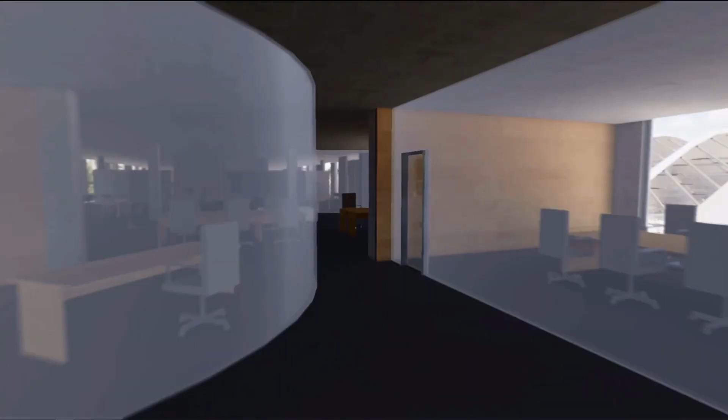So the final topic of the BricsCAD BIM ultimate workflow is visualization and rendering. Unless you are a professional visualization specialist, you might know that rendering can often be quite hard. You have to export your model to a rendering application without losing data. There are a lot of difficult settings that have to be set correctly. You often have to wait a long time before you see the actual rendering result, and hopefully it's correct. So it can be quite hard. We think there should be a better way.

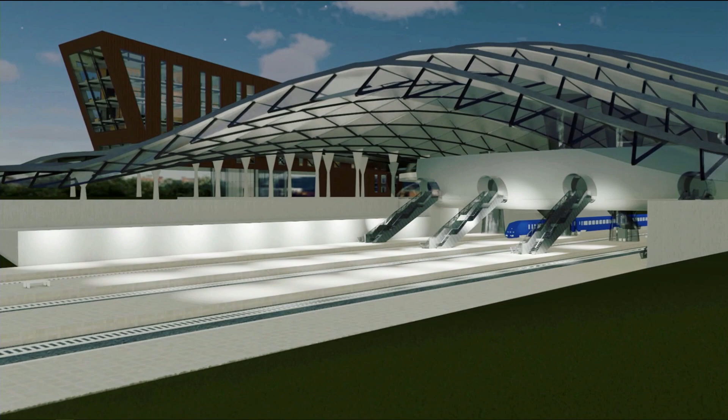And this is why we have partnered with Enscape 3D. Enscape 3D has developed a real-time, high-quality rendering engine that will now also be made available on top of BricsCAD BIM V20 as part of the Bricsys collective. So with this integration between BricsCAD and Enscape, we will offer an integrated workflow where you can do rendering with very little effort needed. Let's have a look at how it works.

From within the BricsCAD application, we can launch Enscape. It's a one-click startup, so this means that there is no export needed, no dialogue. It's very easy. In just a couple of seconds, you see the result of the rendering of your model in the Enscape window.

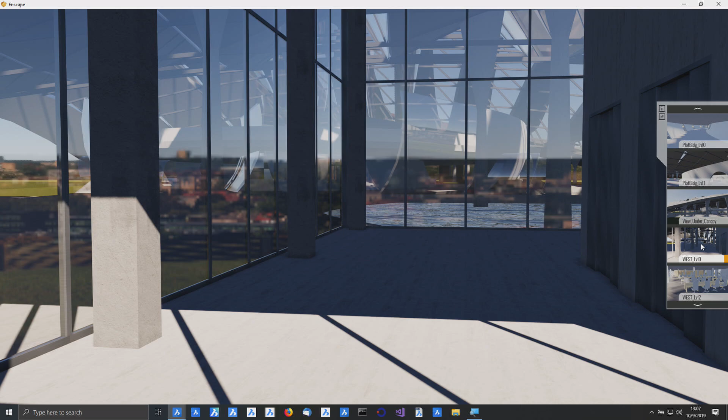The advantage of this workflow is that as much as possible, existing data from the BIM model is leveraged in the Enscape window. For example, saved views - views that are stored in the BricsCAD model are used in the Enscape application to navigate to interesting viewpoints. Also materials, so you don't have to define materials later on. All the material properties are used from the BIM model, and also some high quality rendering materials like for the water or the grass are available to add some additional realism to the renders.

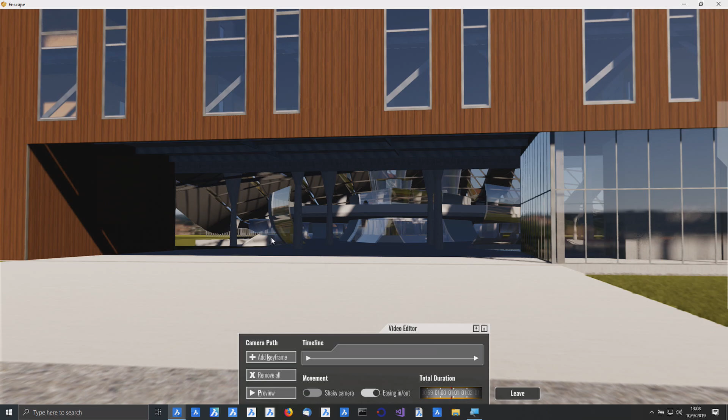It's also a tool that can be used to create animations, so not only static renders but also animations. We can easily add a first keyframe at this position, then move along the west building to see how it looks like. We can move to a second position where we can add a second keyframe, and then move further below the west building to have a look at the terminal and the canopy and how the lighting influences the design of the canopy. We can add a third keyframe at this position.

So we can then choose the total duration of our animation that we want to create, and then we can see a preview of this animation. If we are happy with this animation, we can of course export it as a video to show the animated video as well.

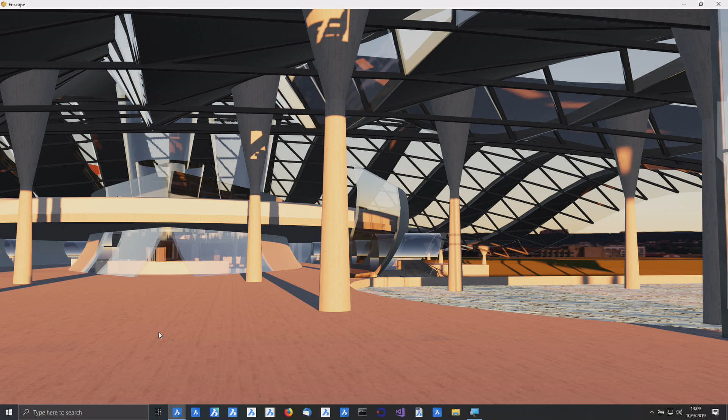Also, the geographic location is used from the BIM model, so this means that it's also a useful tool for daylight studies. By changing the time of day, you can see how the lighting will influence your design, so you can change to different points in time.

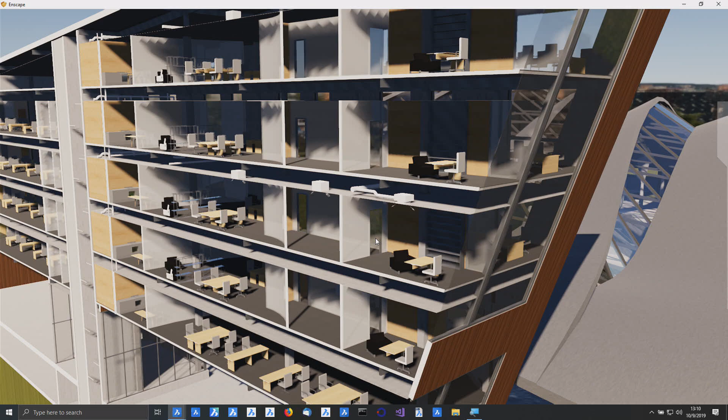A last final benefit of this integrated workflow is that we also support real-time changes. So for example, if you add some changes in the BricsCAD BIM model, add some geometry, or like we just did, activated a clipping section, you will see these changes reflected in the Enscape window as well. If we go to a viewpoint of the west building, we can see a sectioned view of the west building, and if we zoom in a little bit closer, we can see how the three models that we just created today - the MEP model, the structural model, and the architectural model - nicely come together in this integrated BIM.

So with Enscape being part of the Bricsys collective, we have enabled new ways for visual storytelling available in the BricsCAD BIM workflow as well.

I appreciate it. So, in summary, BricsCAD Ultimate - it's a powerful workflow. What we've showed you is that you can intuitively model, letting design lead the way. The integration with Grasshopper enables design ideas to be created, visualized, refined, and incorporated into the BIM. Data and level of detail can be added as the design goes.

IFC and BIM collaboration format panels allow multidisciplinary teams to collaborate on issues more effectively. The power of Propagate can be used and continues to expand to multiple disciplines and other levels of detail. BIM plus mechanical is enabling digital fabrication workflows. And last but not least, the Enscape integration enables visual design storytelling. BricsCAD BIM version 20 - unlock your design excellence.